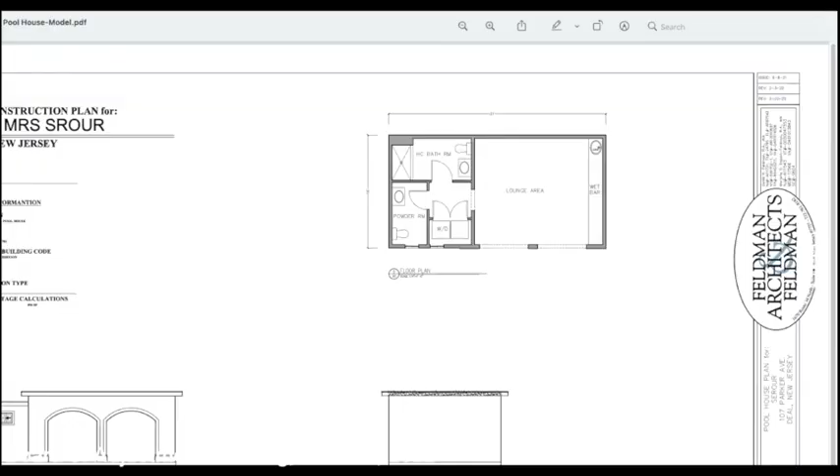David, describe the pool house as it's designed at this time. If I may, can I share my screen? Absolutely, go right ahead. The host needs to enable me. You should be getting it any second. Okay, you should be able to see it at this point. Yes, we can see it.

This was a preliminary drawing of the proposed pool house submitted for this application, prepared by Feldman and Feldman Architects under my supervision. The first thing I'd like to correct is the square footage of the pool house that Mr. Higgins has stated and Mr. Farber has stated. The pool house itself is a structure that is 16 by 31, which amounts to 496 square feet, not the previous 800 that was testified to, or the previous 700 square feet that was mentioned earlier. Mr. Higgins mentioned that the 700 square feet he came up with was based on the overhangs of the structure.

We actually reduced the overhangs of the structure to a 1 foot overhang, which in turn would make the overall footprint of the building: instead of 16, it would be 18, and instead of 31, it would become 33. 18 by 33 amounts to just under 600 square feet, or 594 square feet, not the 700 square feet mentioned earlier. I didn't actually do the calculation as to what that comes out to with regards to buildable coverage on the lot, but it would be less than what was previously stipulated as being 27.1%.

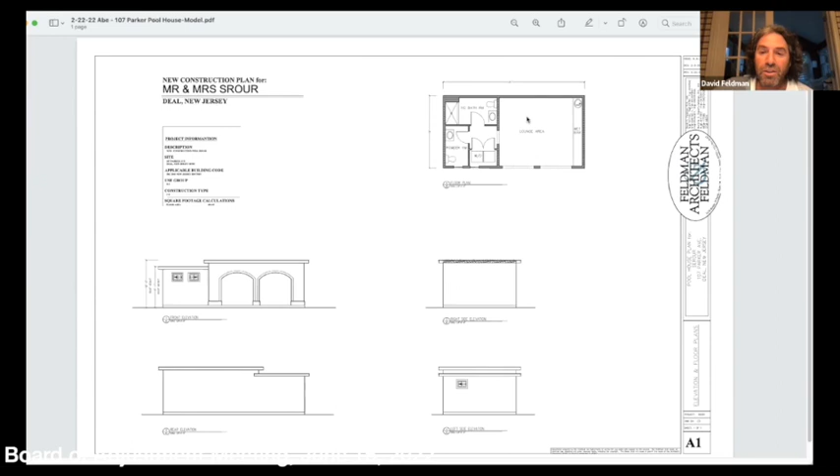So what we did was we actually created a pool house that was 16 by 31, not including the overhangs. And within that pool house or structure, we created pretty much really 4 elements.

We created a lounge area for Mrs. Srour to be able to sit in and under, away from the sun, and still be able to watch what's going on in the pool at the pool level.

We also created a fully accessible handicap bathroom with a handicap roll-in shower. Grab bars will be placed on the walls, and all the amenities associated with a handicap restroom would be incorporated in that.

In addition to that, because of the amount of kids, and as Mr. Srour previously testified to, Mrs. Srour might have times that she's in the restroom for quite some time, so we felt the need for a second bathroom for the kids to utilize if she was in there for an extended period of time.

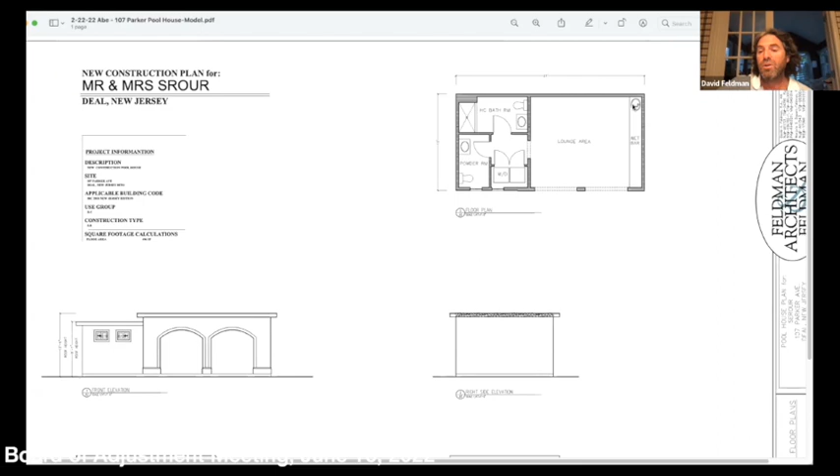In addition to that, we just created a small washer dryer area for all the towels. If you have 30 grandkids using the pool, it kind of made sense. And a little wet bar area with a sink.

This originally was designed to be substantially larger based on the needs of Mrs. Srour, but after going back and forth with Mr. Higgins and Mr. Srour, we tightened it up as much as we felt we were able to and still make it functional for their use.

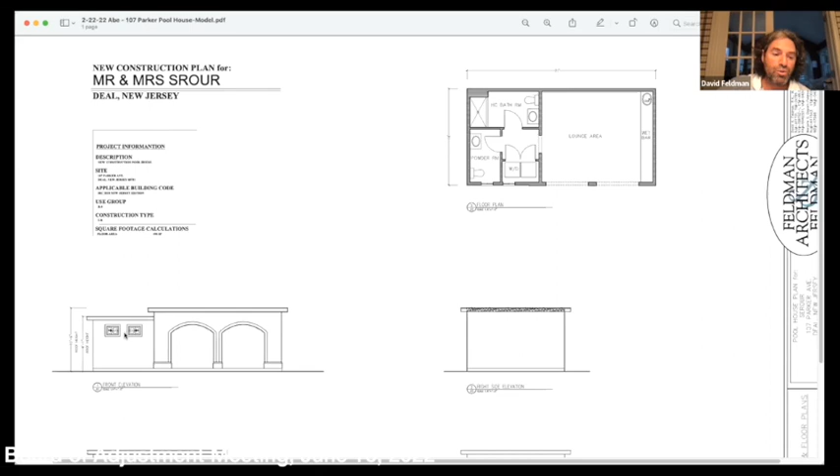We also tried to keep the height of the structure down to a minimum, but at the same time create some interest. So the lounge area at the highest point is 10.5 feet. And then the accessory area, where the bathroom location and laundry area is, is at 9.5, to give some interest to the design.

The materials on the outside are going to match the finish of the main home, so it'll be harmonious with what we have presented with the house.

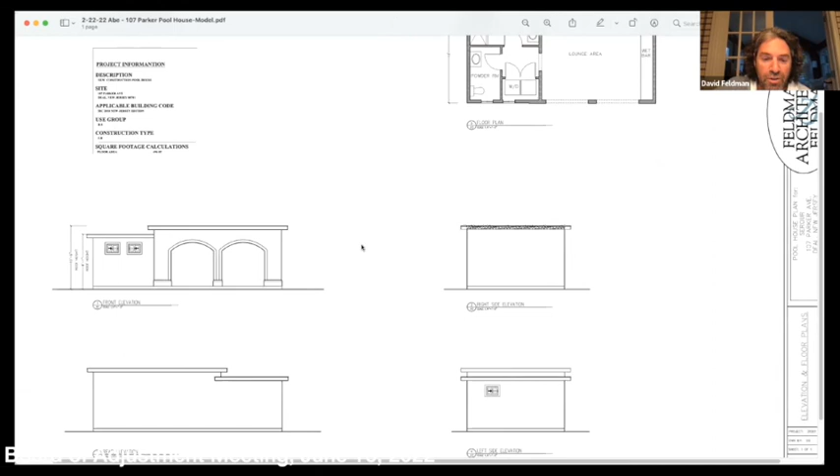As far as the location, I'm going to quickly share the site plan with you and explain why we located it where we did. Let me just see if I can pull that up now. Okay, you should be able to see the site plan now.

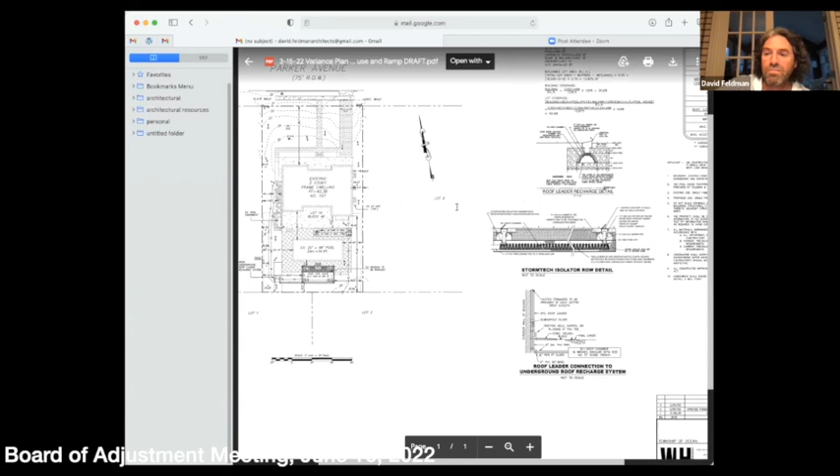So with the site plan, given that the house is existing and the pool is existing, we really had 2 locations to choose from. We had the southern location of the property, which is where we opted to do it. We also had the western side of the property, where we chose not to do it.

The reason we chose the southern property was twofold. One, as Mr. Fuller questioned earlier, with the 2 homes located to the south of this subject property, the properties for those 2 homes come pretty much into the middle of Mr. Srour's property, depicted by this dotted line. Lot 2 has a significant backyard of all green area over here, and the house on lot 1 is located more westerly on the property.

So looking out this way, there's a lot of green area. The house on lot 11 is situated closer to this property line on the western side of Mr. Srour's property, or the easterly side of lot 11. So we felt that the pool house in this location would create the least obstruction with the existing lots surrounding it.

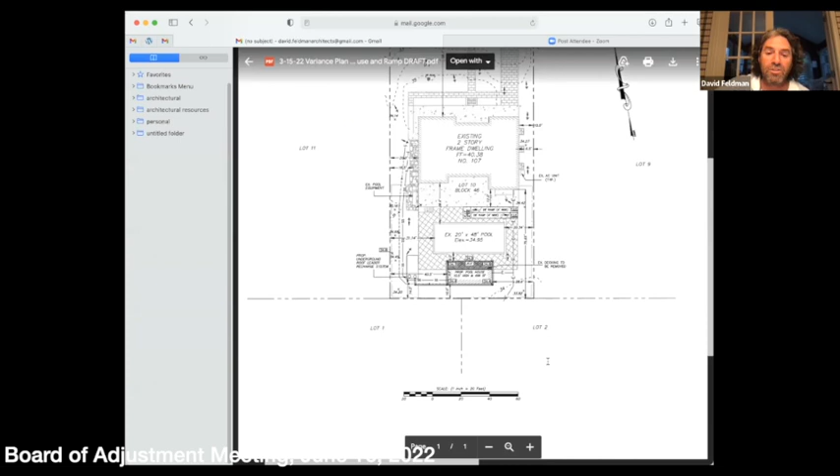In addition to that, the way the ramp works coming down off the back patio, because of the height differentiation, we needed a ramp that was almost just over 50 feet in length, closer to 54 to 56 feet to be exact. So the engineer came up with a U-shaped ramp that comes down from the east, heading west, and then from the west comes back around to the east.

If you notice where the ramp is located, it doesn't leave much clearance between the ramp and the pool. So our thought was that maneuvering a wheelchair back across this thin area between the ramp and the pool was not a safe condition, and it made more sense to bring the wheelchair and Mrs. Srour down along this side and then across the back side of the pool, where we were able to still have 6 feet from the cabana to the pool and maintain 10 feet from the cabana to the rear property.

Other than that, I don't really have anything else unless somebody has something for me.

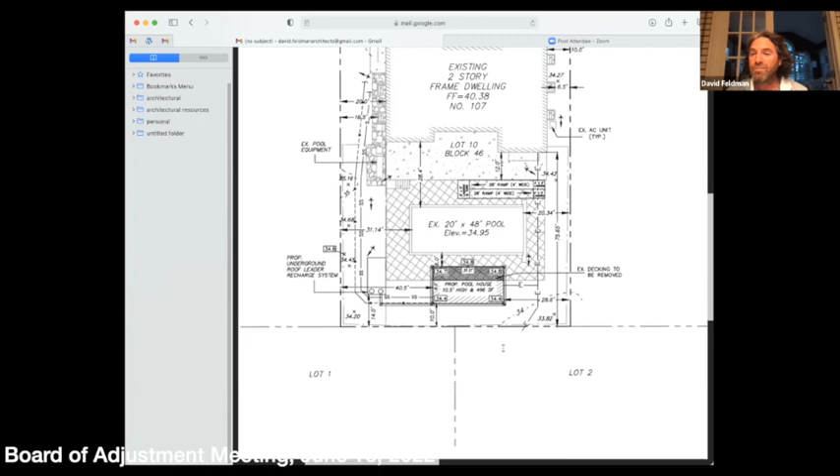By placing the cabana where you have, and by doing the ramp there, you are eliminating a substantial percentage of the pool decking area. Is that correct? Yes. Okay, and that sort of is to keep down on coverage and to try and lessen the impact, correct? Yes. All right, Mr. Feldman, I don't believe I have any other further questions.

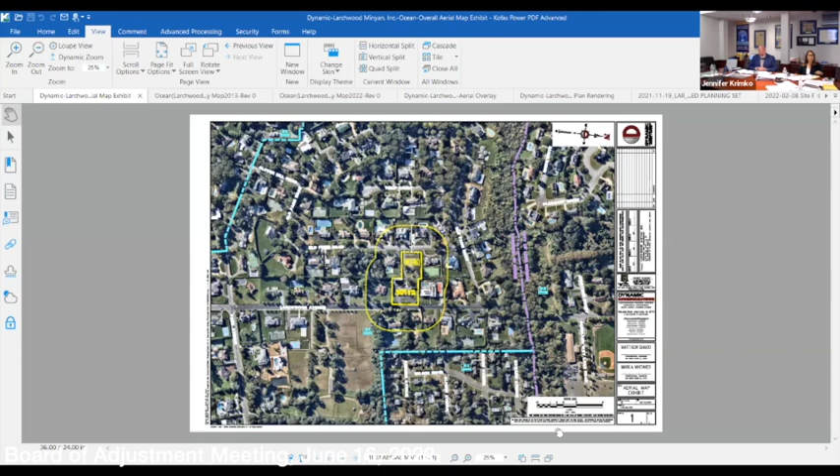So this is, as mentioned before, located at 48 Larchwood Avenue. This is the existing synagogue along Larchwood Avenue. It's block 8.02, lot 3, and lot 23.

Existing on site today are 2 buildings. The first building along Larchwood Avenue is a 3,857 square foot single story building. Behind that, there's an accessory building that is 757 square feet. There's sidewalks throughout the site, plenty of landscaping along the perimeters and along the roadways.

There is a through lot, which Mr. Masri noted before, that goes to Old Farm Road. There is no access point to Old Farm Road, just a pedestrian access. Along Larchwood Avenue, there is a one-way in, one-way out, a horseshoe driveway. Starting from the north side of the driveway is the entrance, the right side of the plan for those at home. You loop around the front of the building and exit out to the south side of the property.

I'd like to go proposed. Well, would you like me to go to the proposal, or do you want to talk about the community first? We can talk about the community first.

So I filed a request of the town. I reviewed the minutes of the hearings from 2013, and there was evidence moved in as A1, which was a tax map reflecting highlights of all of the homes in the immediate vicinity owned by congregants or people who attended this synagogue. So I had Matt overlay that onto an aerial tax map. What I'm going to show you now is what we marked in as A9, the congregation exhibit from 2013. Since it's not really readable at this point, Matt, why don't you take a minute and explain what the different colors are and what the dotted line is around?

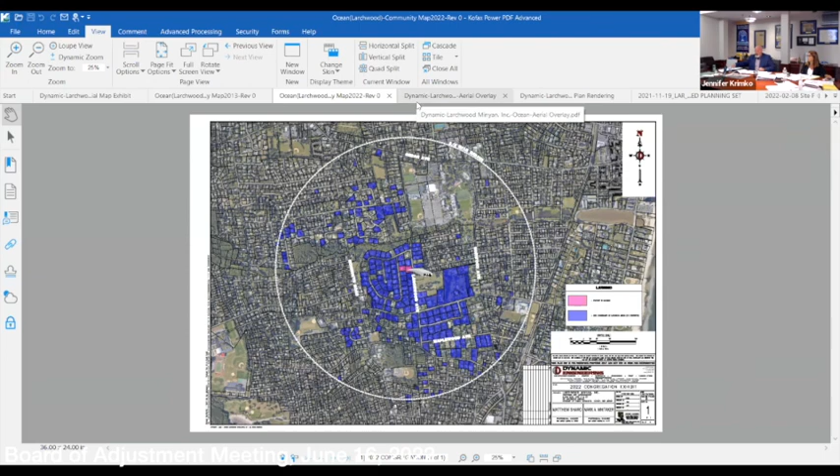Okay, and so in '13, there were how many? 75. Okay, and now we're almost 3 times that. Almost 3 times. Okay, so recognizing the need then for the community and the testimony from Isaac with regard to the overcrowding and people praying in hallways on holidays and even on Shabbat, what are we proposing now?

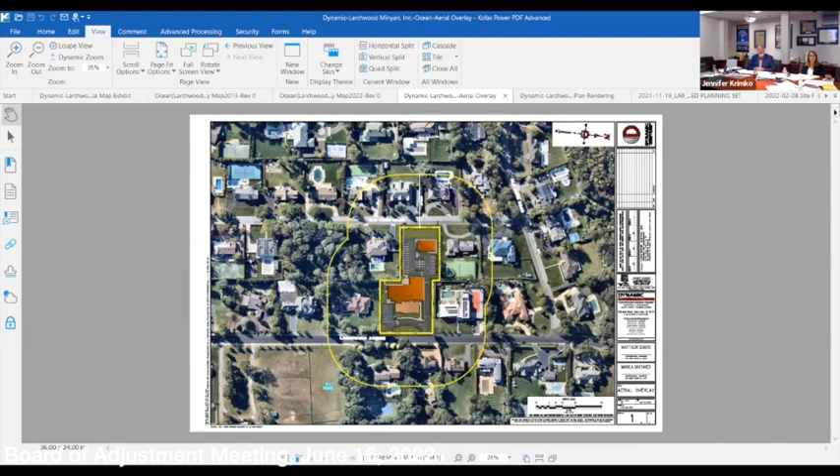This is A8 in evidence, the site plan rendering. I'm going to enlarge it now that everyone has seen the context, so the details are more clear. Yep, so this is actually, I think, an overlay of the renders. Oh, this is, yes, I'm sorry, this is the aerial map exhibit. Oh, we didn't introduce it.

So let me move on to the site. Disregard that one. Actually, since I showed it, just for purposes of keeping the record, A11 is an aerial map overlay, which is the color rendering overlaid over the aerial map, also dated 6/16/22.

So as Ms. Krimko noted, this is a render of the site plan over the aerial map that we previously introduced when I discussed the existing conditions. What I'd like to do here is show just a snippet of what we're proposing over the aerial, so it gives you an idea how it relates to the property surrounding it. As you can see, the existing building is in light orange along Larchwood Avenue at the bottom of your screen. The darker orange color behind it is what we're proposing here tonight, the addition to that existing building. And then to the rear of the site is the mikveh. I'll get a little bit more detailed, but I just wanted everybody to get an idea of how it's going to look on the site and how it relates to the surrounding neighborhood and properties.

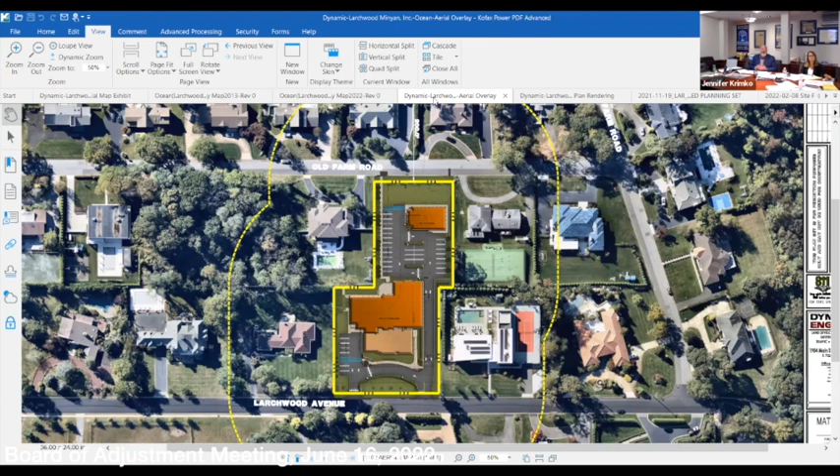Can you still go to the site rendering? You can go to the site rendering. Thank you.

So this is Exhibit A8, a site plan rendering prepared by our office dated 6/16/2022. This is basically the same site plan sheet that is in the site plan package. We just added some color to it to make it pop for everybody at home, and we also added some landscaping elements to show what's going on site.

I'm going to start with the addition. As I noted before, you have the existing synagogue building at the bottom of the page along Larchwood Avenue. For purposes of this call, north is to the right. Along Larchwood Avenue, you have that existing building in light orange. Behind it is the proposed addition, an 8,723 square foot addition - that's just the footprint. That's not the other elements, which our architect will get into later. Behind that is the proposed mikveh in dark orange, which is 2,770 square feet, again just a footprint.

So I want to touch on operations, then I'll get into the site layout. Operations for a use such as this include deliveries, open hours, and trash storage. The beauty of this is it's all going to stay the same. Deliveries are standard mail deliveries, FedEx, UPS, postal services - they're not getting large deliveries for anything. Just like the residential neighborhood around it, the postman comes to the front door, drops off the mail, and leaves. They enter off Larchwood Avenue and exit off Larchwood Avenue, and that will happen with the proposed application as well. Hours of the synagogue will stay the same, obviously.

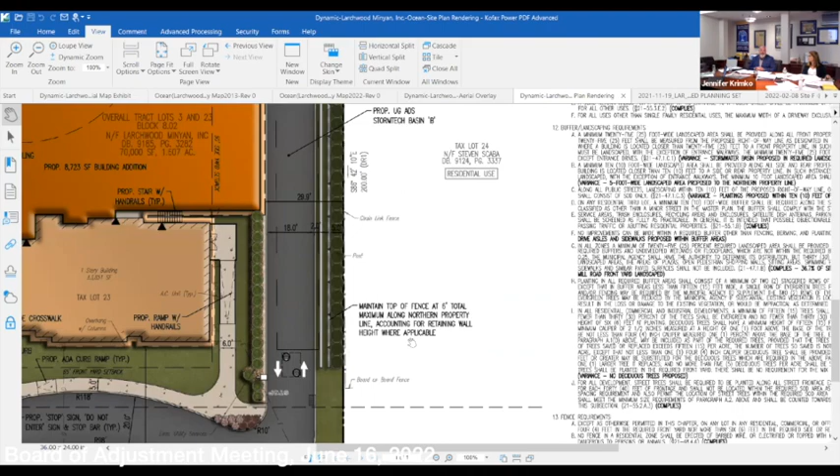Is that correct? That is correct, going up the north side and making the left at the property. Okay, and the sound wall is here? That's correct, in the gray hatched area. And the sound wall is how tall? 10 foot high. So we're proposing a sound wall that's 10 foot high. The maximum height permitted is 6 feet, as we know. That's correct, so we do need a variance for that, but it's at the request of the only neighbor that it will have any kind of impact on. Correct. Okay, thank you.

Now, if you go to the south side of the site, I want to just introduce the 8 parking stalls over on that side. So as you come into the property from the north side of Larchwood Avenue, you can go in front of the building, and then there's 8 additional parking stalls in the front, including 1 ADA stall.

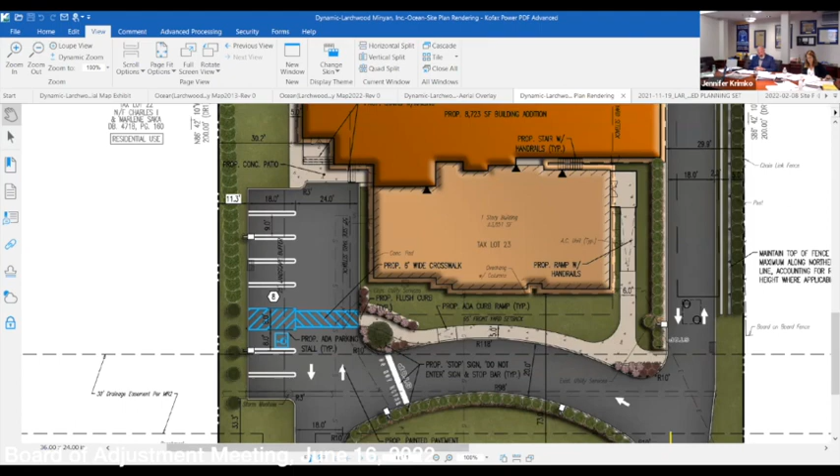As far as bulk requirements go for the project, there are a few variances that we were requesting. The first one is the front yard setback, and that is to the Old Farm Road setback. You want to scroll up? Yep, for the mikvah - that's for the mikvah. The requirement is 65, and we're proposing 47.2.

Well, just what for a single family home that could be 2 stories and 35 feet, what's the setback requirement? 65. No, not for a synagogue, not a conditional use standard. Just 65. No, that's not.

All right, we'll go back to that. I'll have to find if there's a different one. We'll go back to that. Reanalyze it for the synagogue.

But this is the mikvah that needs that variance, and it's only one story in height? Yes. And the architect will testify as to how tall that is. Correct.

So the next one is the side yard setback, also to the mikvah, to the north side of the mikvah. Requirement is 50 feet, and there's 13 feet proposed.

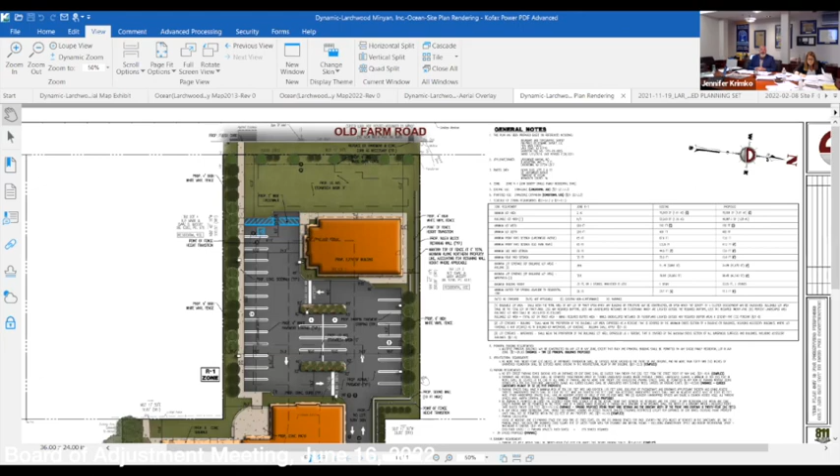The rear yard setback, and this is kind of a tricky situation due to the through lot here. There is one small rear yard along the middle southern portion of the site, right there. And that's a 75-foot requirement, with 15.8 feet provided there.

Lot coverage is building coverage. We are proposing 34%, and 30% is required. So we're just above that.

Right, but before you go into that, so in Ocean, typically on a residential lot in this neighborhood, you'd be required to deduct 25%, and if there's any wetlands or environmental constraints, that's your buildable lot area. That's correct. But because it is a synagogue and has the requirement of the 25-foot buffers, all of that buffer area is actually reduced out of the buildable lot area.

So if it was treated as a typical lot, would we meet the building requirement? We would be just about meeting the building requirement, yes.

And then the impervious coverage is at 98.4%, where 75% is required. Again, as Ms. Krimko explained, there's some calculations into developing and creating the buildable lot area. If we didn't have those requirements in that calculation, 98% sounds daunting, but it's really 66% coverage of the property.

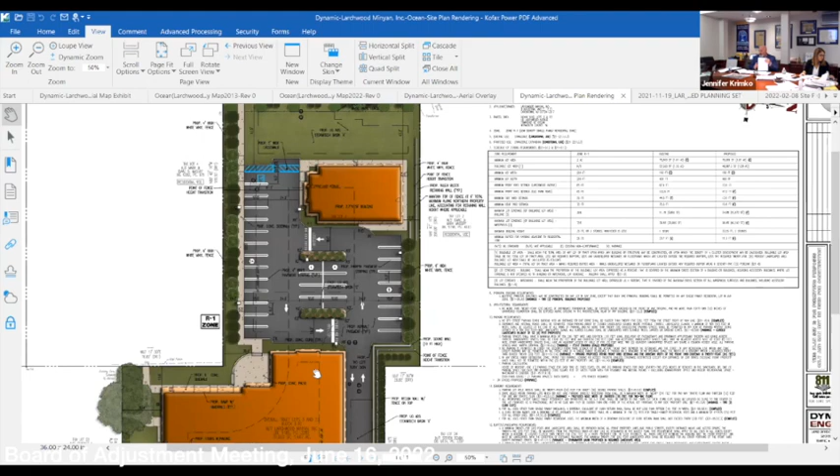Mr. Sharrow, I just have a couple of questions, actually pertaining to the plan rendering.

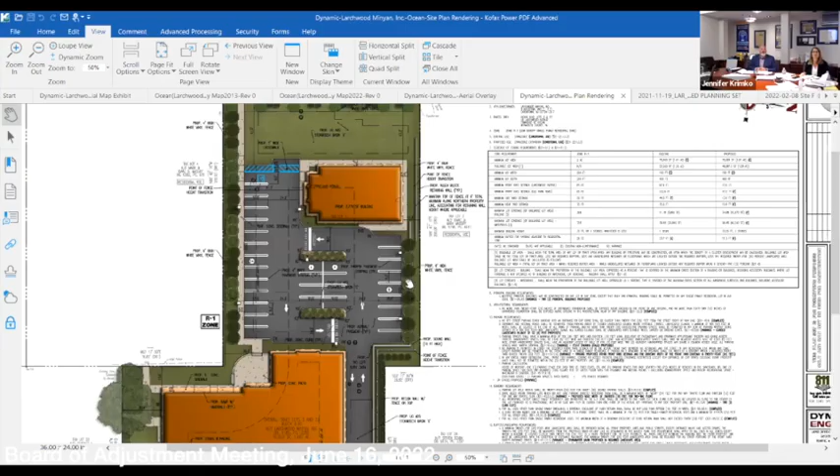Ms. Krimko, you mentioned no perimeter fencing. So everywhere it's going to be a sound wall? No, I'm sorry. The only place there'll be any type of fencing at all is where the sound wall is, right here. Anywhere else it says fencing on the property, there'll be nothing.

Okay, and you mentioned that was for the neighbor who requested it, to the right? This sound wall was in response to a direct request from the neighbor to the north.

And to clarify, obviously existing fencing will remain. Right, but we're going to clean up the plans to show what fencing will be there. What I wanted to indicate was we are eliminating the variance for fence height in a front yard altogether. The only variance for fencing we are seeking is with regard to this sound wall. I apologize if I wasn't clear.

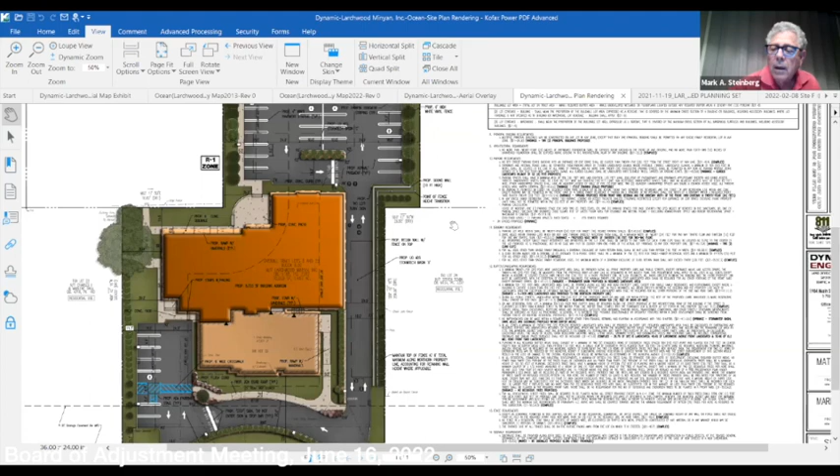And Jen, what's the setback of the first part of the sound wall? Is that a front yard, or does it commence after the front yard? It starts after the front yard setback. Is that the conditional use setback or the bulk one? It starts at the 65-foot front, the conditional use setback. Okay, I can't read the numbers. Thank you.

Were there any other questions from any board members? I had a question. Go ahead. Oh, I'm sorry, no, I have a few questions, so if you want to go first, it's fine. Sure, I just had one. Do you want me to leave this up or take it down?

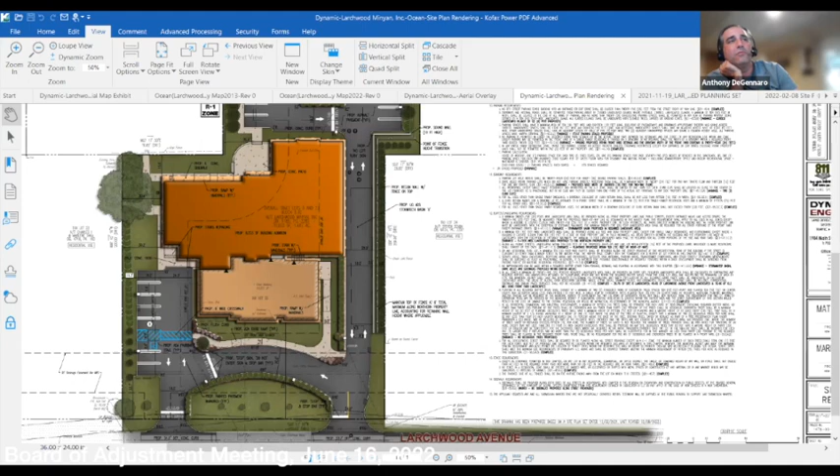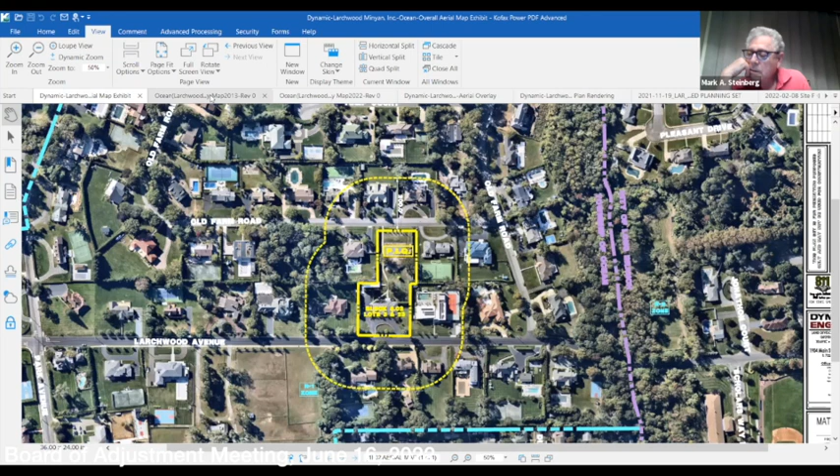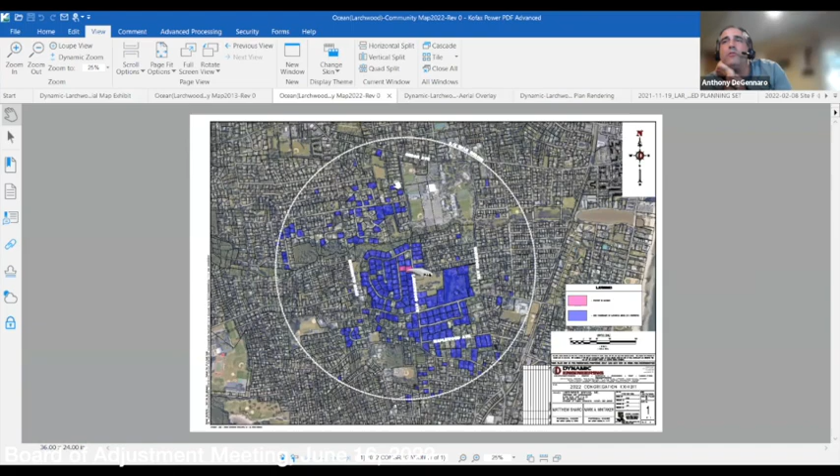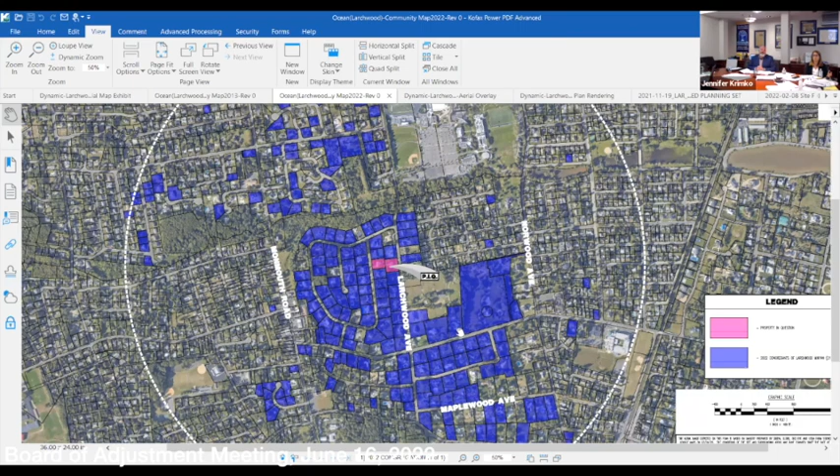That's it. So you're showing the location of people that worship at the synagogue and the location of the current synagogue. Where is the closest one outside of that where people could go to worship? Well, I'm not sure, because everybody we're showing you worships at this synagogue. I get that, but if there's one on Norwood Ave, it's not necessarily a hardship for somebody to go to the Norwood Ave one. And I know there's not one there, right? I'm just using that as an example. It's not a hardship for them to have to walk to the Norwood Ave versus expanding the Larchwood Ave one.

So the good news is, Mr. DeGennaro, that religious uses like this are protected, and the government really can't tell people where to pray or how to pray. That's a federal law. So this synagogue serves the people who want to pray here, and I don't think they have to establish a hardship. You'll get more testimony from our planner and their planner as to this expansion. It's not a hardship variance, it's a D3, which is a conditional use variance that the site can meet notwithstanding the conditions — the site can accommodate it. So it's a little different standard, so don't get the hardship involved at this point.

But Mr. DeGennaro, following your train of thought, the reason for this was to show the explosive growth of people who want to pray with this rabbi, with this community. That's the sole purpose of this exhibit, to show the need for the expansion. But understood.

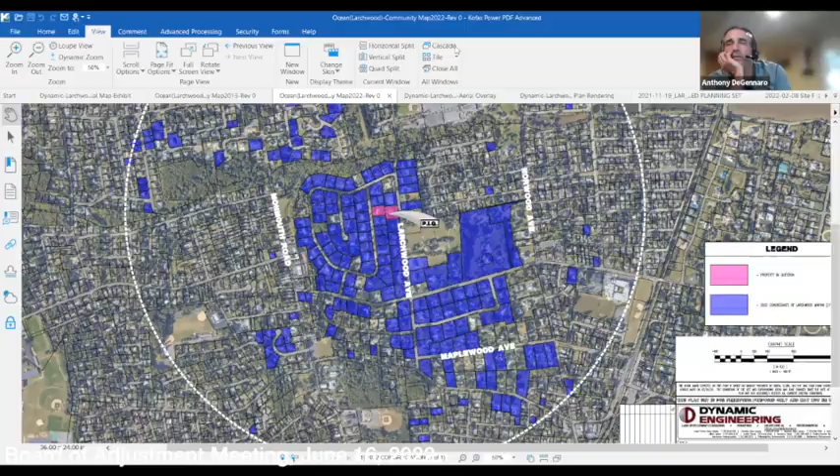Can I ask a few questions? Sure, would you like me to put anything up, Mrs. Tellerico? No, it's more generic questions because I appreciate the information that Mr.

I guess his name is Misri, I'm sorry if I said it wrong. He is sometimes, but tonight I'm very interested in all of this, and this is more a generic community question. So, is this house of worship open to the general public in our community, or is it by membership only, or how would you be able to go there as a general community member just if you're interested in the customs, the traditions, learning more about it?

Isaac will be happy to answer that. Sure, as I mentioned, we don't charge membership, so all are welcome. It's an Orthodox Jewish synagogue, so yes, all are welcome.

And just to go a step further, Vin Gopal, for example, has come, and he's not Orthodox Jewish as far as I know, correct? Correct. But he has come and prayed here or experienced the prayer here. And many township officials or other people who are not affiliated with the Jewish faith at all are welcome to come and observe, much like anything. There's no entry fee. No.

And I'm very happy to hear that, because our community is very close knit and we attend a lot of events together. And I'm very happy to hear that your synagogue is open to people of all faiths. I do have other questions. Are there any events that include the full community? And when I say full community, I'm saying Ocean Township, anyone that lives in the town.